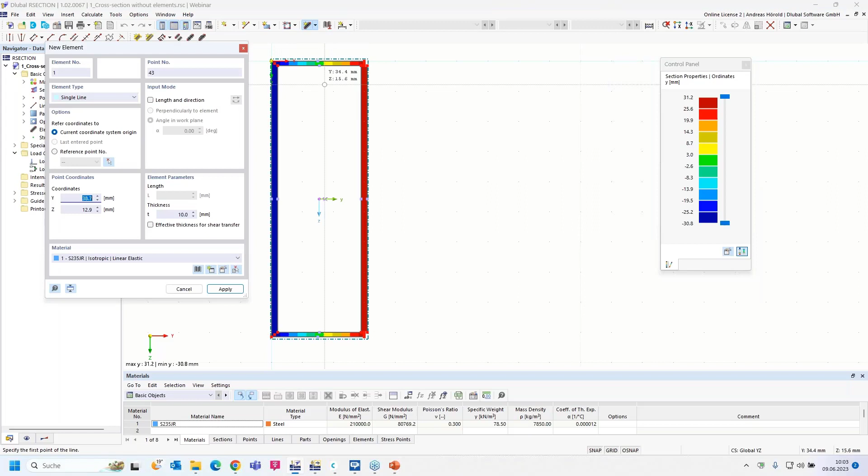How to do that? On the top menu, you can see 'new element'. I use a single element and define the first element here with a thickness of 3 millimeters. Then the next one, that's the web, and that's 4 millimeters thick. Then 3 millimeters.

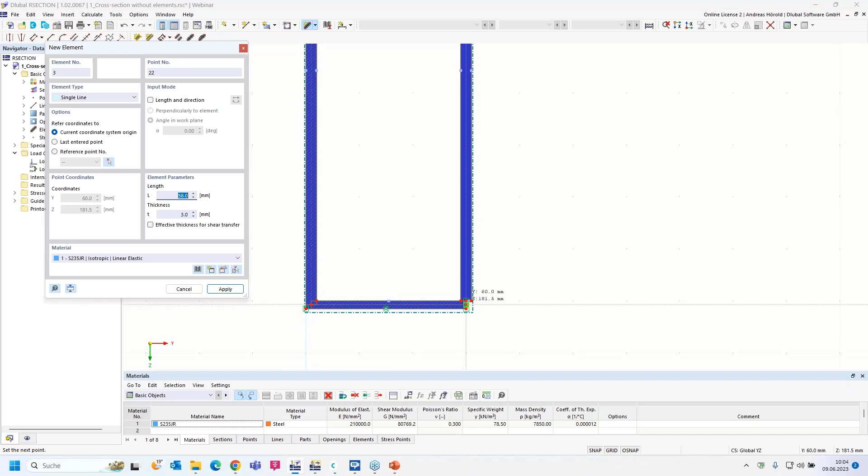And the last one, 3 millimeters. No, that was wrong, that is 4 millimeters. We can delete it, that's no problem. Again, the element, 4 millimeters.

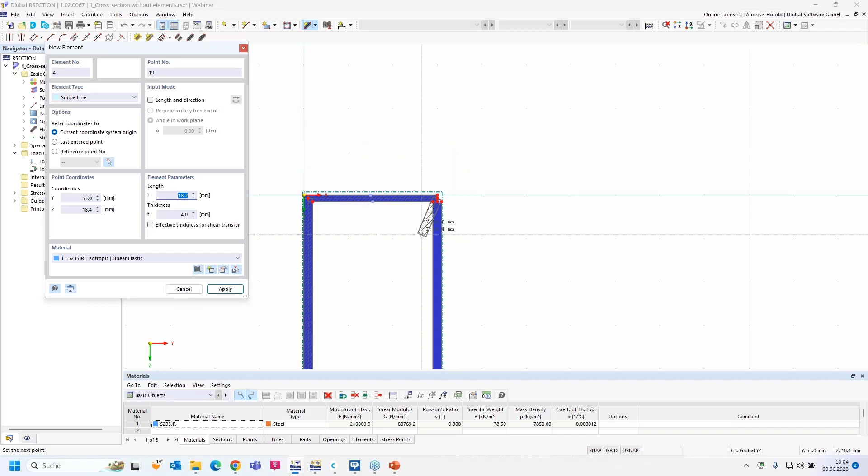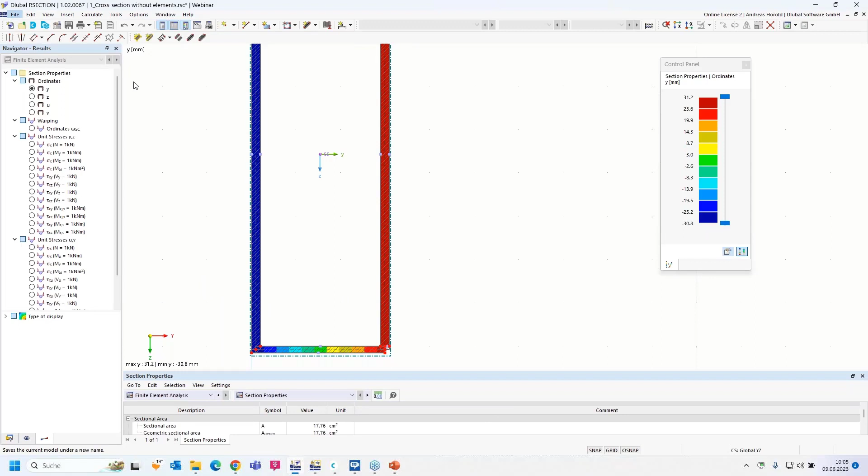That's all. Then I can calculate the cross section again to see all is fine. All is fine. I say File, Save As, 'Cross section with elements' this time, and I overwrite the old one.

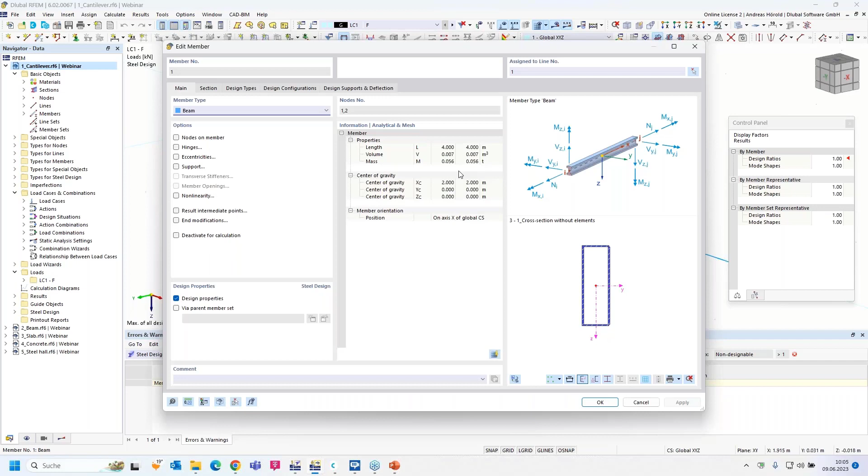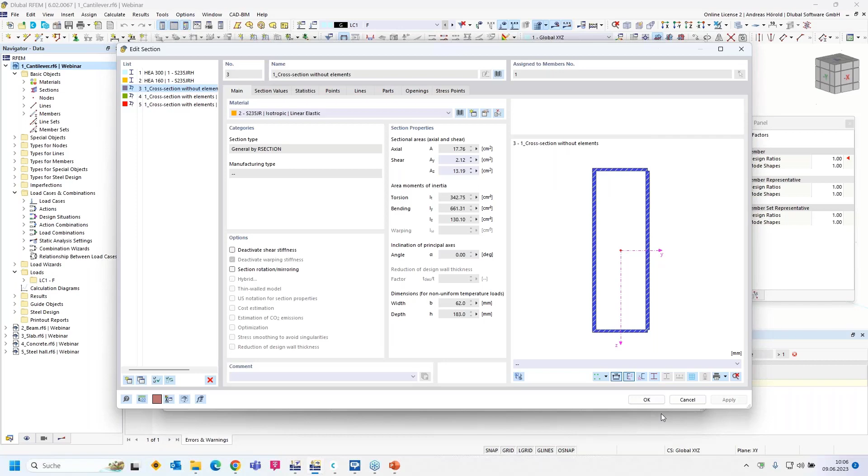Then I go to RFEM 6, double click on the beam, go to section, and edit the section. I go to the library at the top and select from Cross Section Software, choosing the cross section with elements this time. Now the design should be possible.

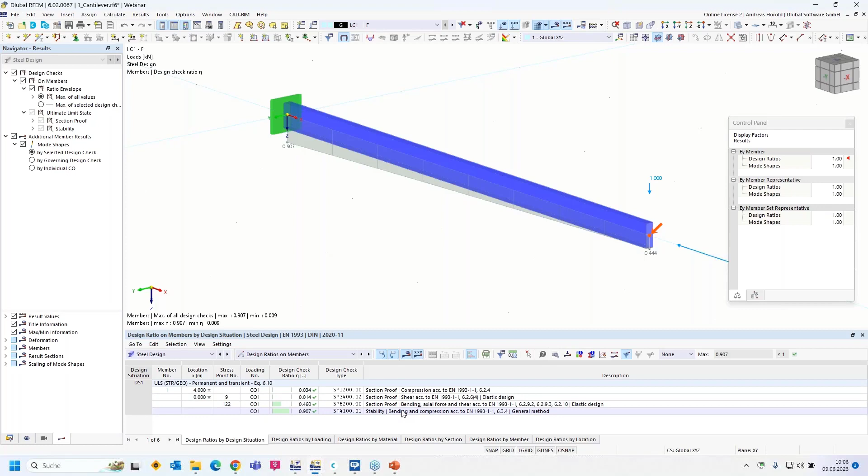Those elements are necessary for the classification of the cross sections. You can see, for example, when you go to the section proof, the section classification here, with all the formulas from the standard and so on.

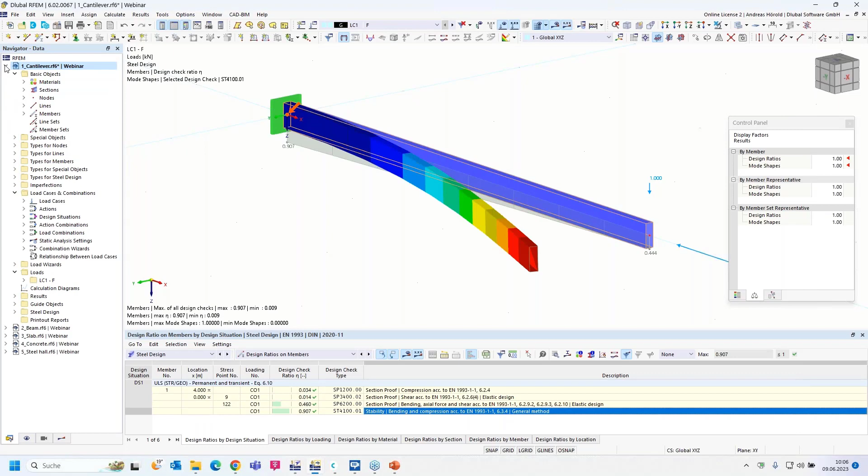Now we turn to the next question: why is my cross section non-designable? You can see the error message from the steel design add-on: maximum allowable thickness of material exceeded.

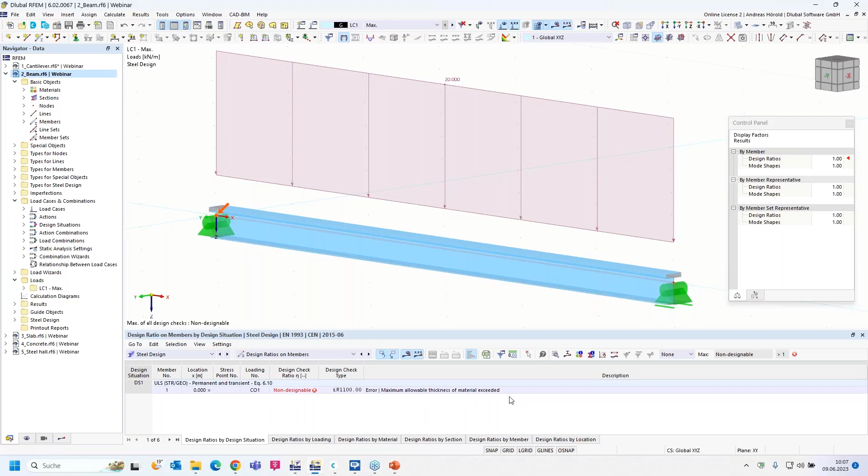We can double click on the member and go to the section. Let me show the cross section - it's a fictive cross section with a very thick upper flange, 45 millimeters thick. When I go to the material, you can see there are only values available up to a thickness of 40 millimeters.

How can you correct that? There are two possibilities. The first is to go to the main tab and check 'user-defined material', then you can enter the values for the maximum thickness and the yield strength.

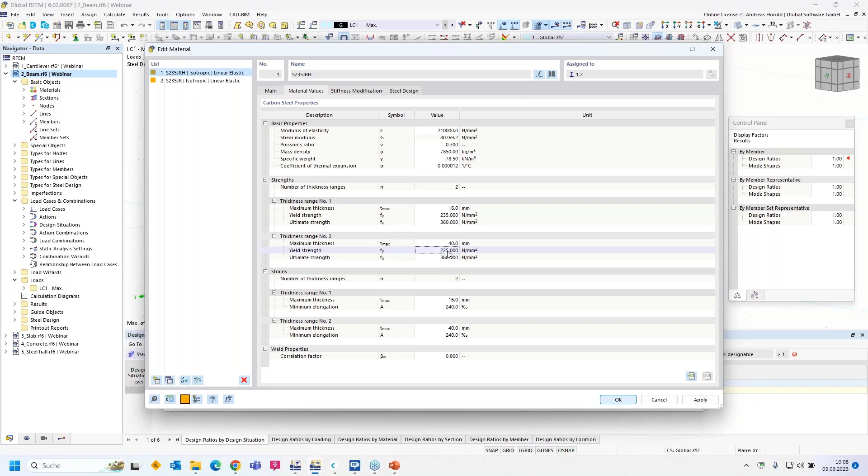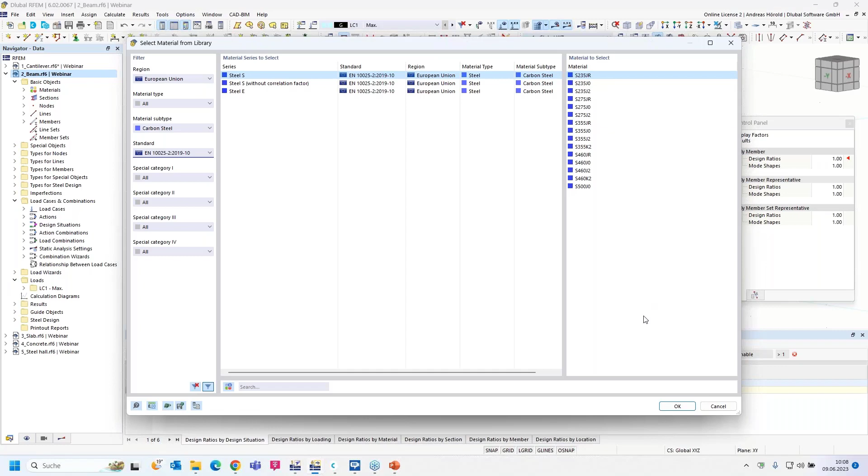But the better option is to modify the material or create a new one - European Union, carbon steel - since I know this code has more values. Now you can see the different thicknesses, 40 millimeters, then 100 as maximum thickness, with the decreased yield strength shown. Okay, I select this material.

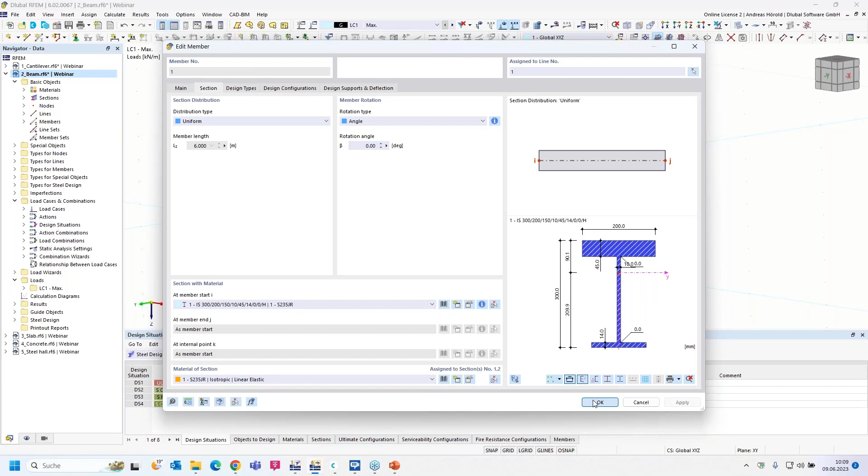Okay, and then the calculation or the design should be run. Okay, now it's okay, we corrected this. Yeah, it happens often that users choose not a wrong material, but a material that's not valid for thicker flanges or thicker members or parts of members.

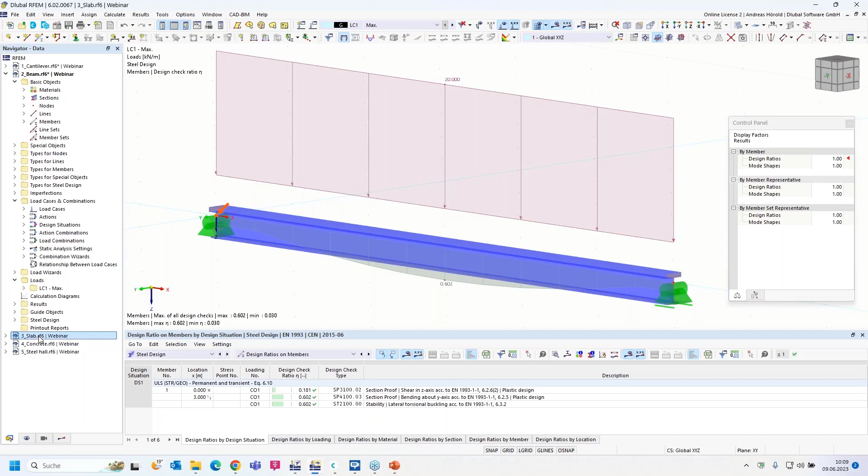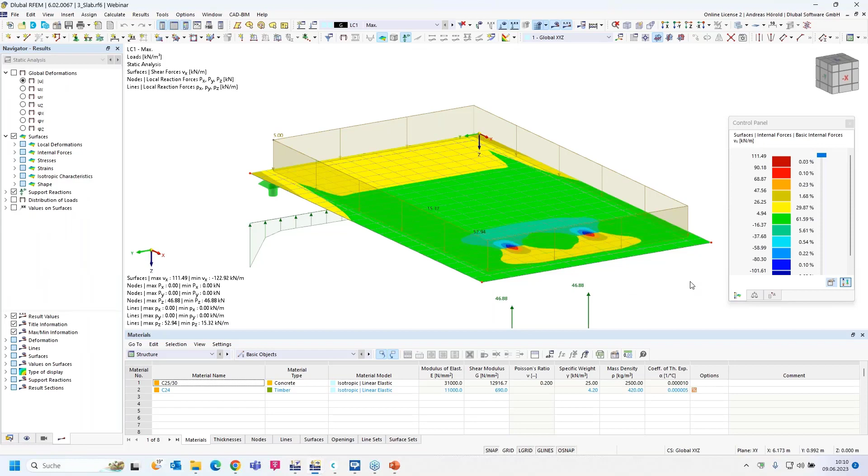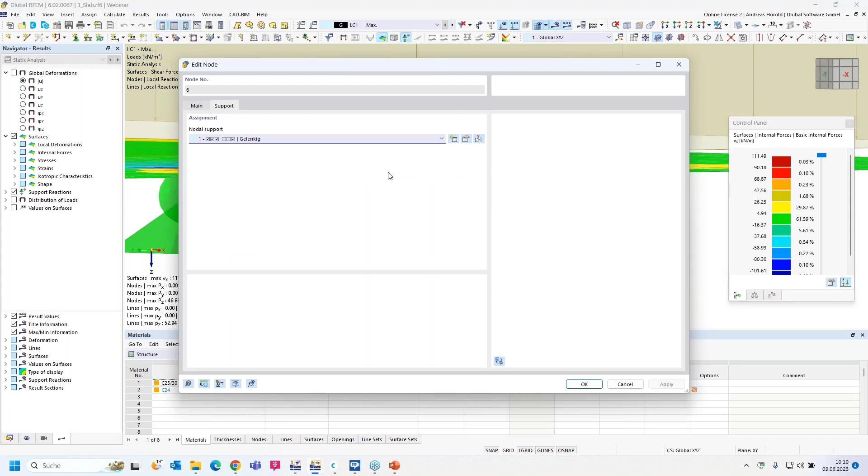Okay, then we turn to the next model and the next question. Yeah, a simple slab. The question is: is it possible to calculate the spring of a column for a nodal support by the program, without modeling the column? Now, if we show the results, you can see through the RFEM calculation there are singularities. We have, for example, columns under the slab, and we defined only a nodal support. So let me double click on the nodal support, on one nodal support, to modify it. I create a new nodal support.

There is this option available, stiffness via fictitious column. And if I go to the table, this fictitious column is recommended for point supports of 2D systems. Here you can determine the support spring constants. You can see them here from the parameters of the column that is not represented. So let me go through the single options.

You have different options for the model support. I'll come back to that later. You can define a rectangular or circular column head, and define the dimensions. I change the dimensions, and when I change the dimension, you can see the changing of the spring constants. Just take a look at them, here. Okay, then, for example, you can enter a different column height.

Then, for example, rigid at the column base, or semi-rigid, or hinged. You can also consider a shear stiffness of the column. Then you can choose a different cross-section of the column if it is different than the column head. Here you have to define the material.

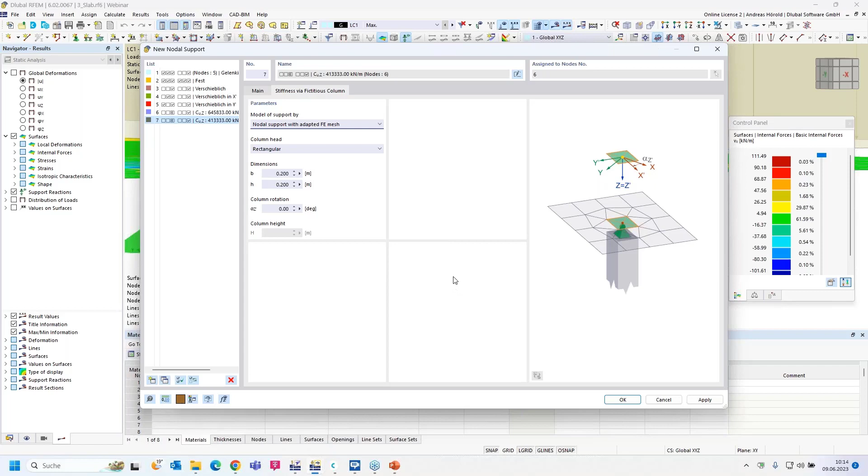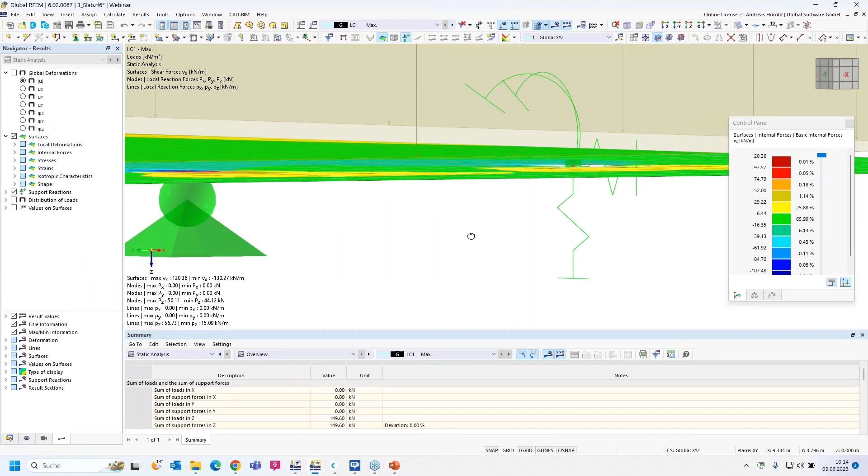Then the last option is the nodal support with adapted mesh, and this model corresponds to the elastic nodal support, the second one, but no springs are applied to the point-like supports. You can see that here, and you can also see that there are no springs. We choose the first option, okay, and we need to calculate it all again. So, and you can see there are no singularities anymore for this nodal support with the fictitious column.

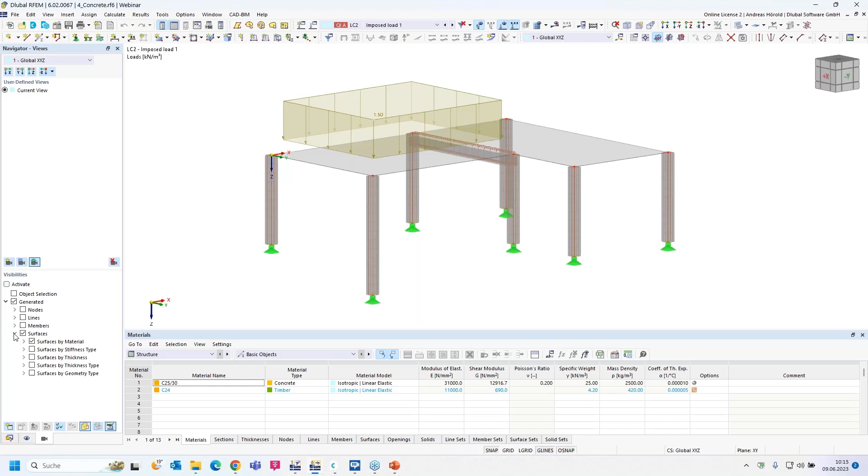Okay, then we turn to the next model and the next question. The next question is: when I select a certain object, why aren't the associated objects shown in the Navigator views? So let's go to the Navigator views here, left at the bottom. You can see the Navigator views. So, and if I activate a view, for example, for the surfaces, there's only one surface, and you can see the surface is displayed and selected, but no lines, no nodes, and so on, no loads and no nodes.

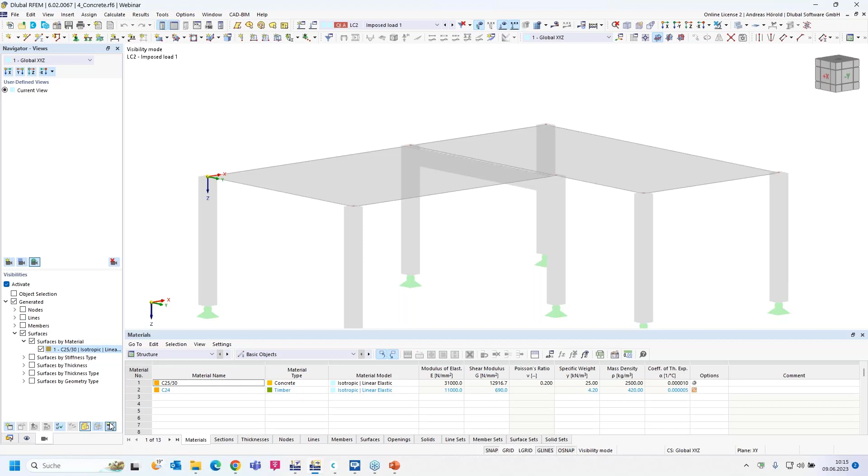Yeah, loads and nodes. And how can you avoid it? Here, left at the bottom, there are nine buttons, and on the right you can activate or deactivate the 'ignore related objects' function. If I deactivate it, then you can also see the lines and nodes and the load that belongs to the surface. And if the function is activated, associated nodes and lines are hidden, as you could see. Okay, those are the different options. Yeah, a quite hidden button. Okay, that should be all for this model and this question.

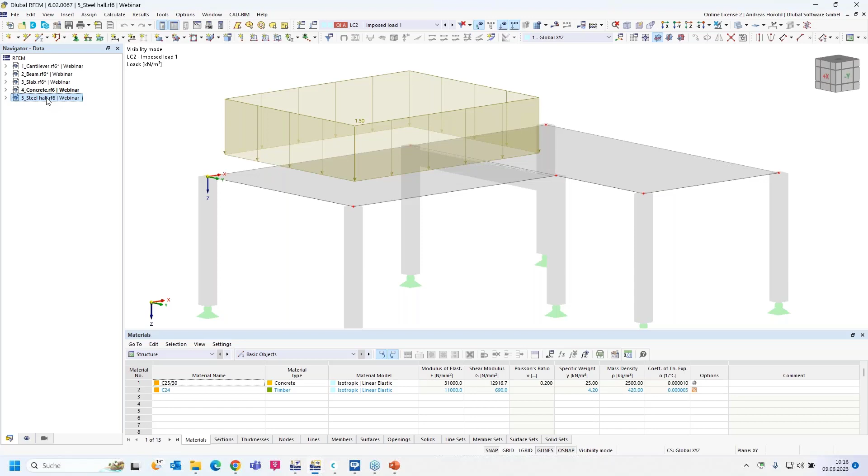Turn to the next question. When designing steel structures, I get a message that bending about the z-axis is not applicable for the general method. What can I do to still perform a stability analysis?

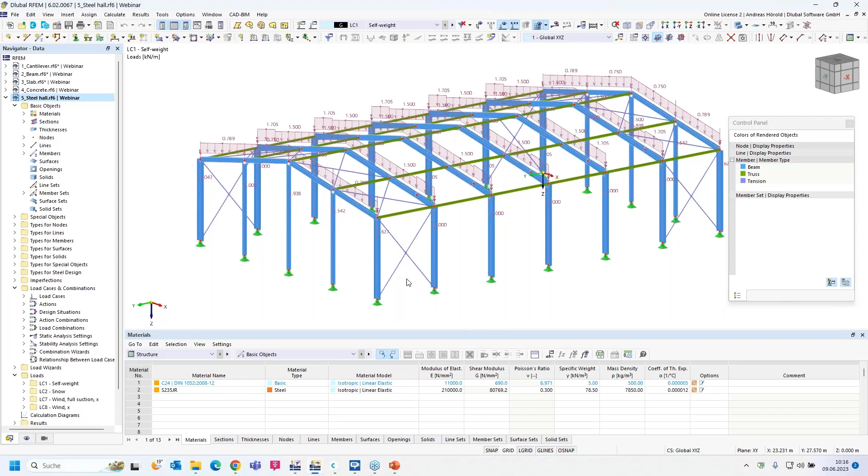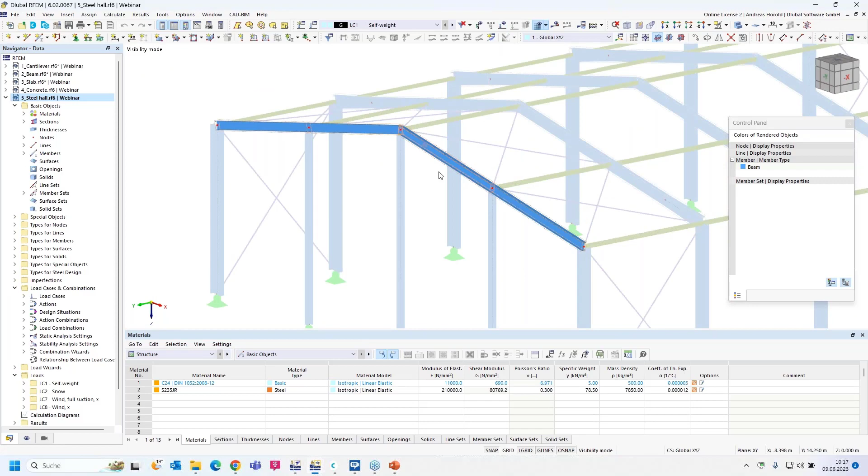Let's do that on an example. I would like to design this member or this set of members. I select only this member and use visibility by selected objects. I double click on the set of members.

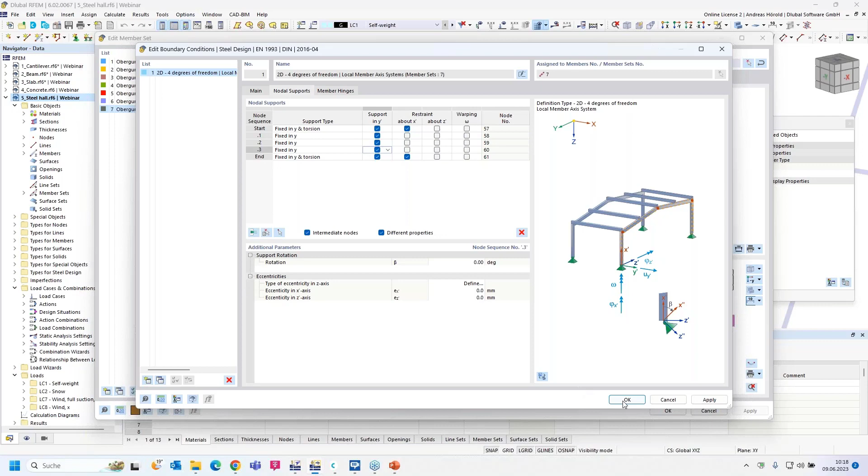For design type, I select this design type. For boundary conditions, I define the nodal supports. I click on the member set, and the program recognizes the intermediate nodes. I would like to also consider a support in the horizontal direction through the coupling members. You can see the supports here, and we can run the steel design to design only this member set.

This is member set 7. Let's run the calculation. Now we will get the mentioned error message.

The message is: general method according to Eurocode 3, 6.3.4, is not applicable for bending about z-axis. The reason for that warning is that the member set is designed according to the general method. However, this method is only allowed for loading applied in the load-bearing plane, that is, without transverse bending moments. That's why the warning appears.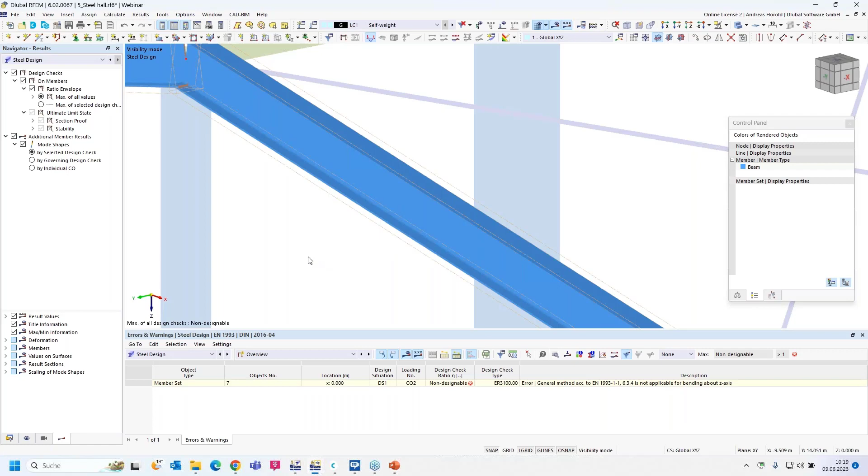There are different possibilities to avoid that. One possibility is to use the torsional warping add-on, which allows you to perform a stability design according to second order analysis as a cross-section design. But there are also possibilities to avoid using the torsional warping add-on, using the steel design add-on instead.

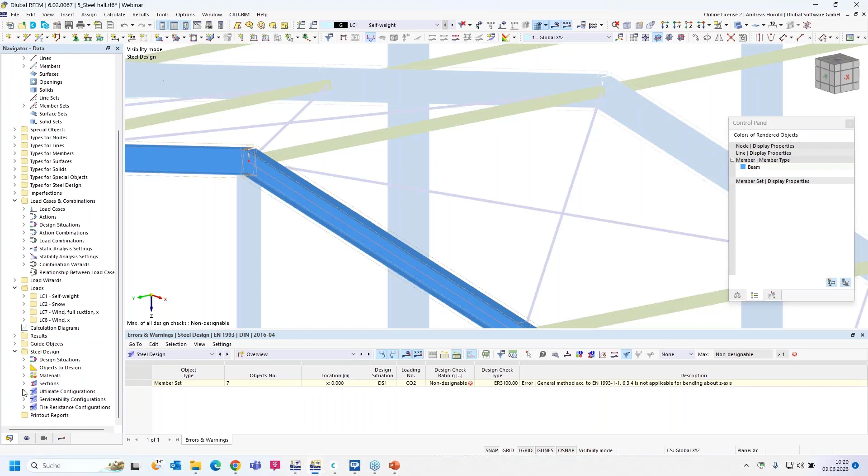As an alternative, you can activate the transverse bending in the ultimate configuration. I open the Navigator data, scroll down, and under steel design you can see the ultimate configuration. I double click on that. If you are sure that you can ignore the Mz, then you can increase that value here. That would be a possibility.

Another possibility is under the stability tab, where you can check the extension methods and then the adapted method. This enables double bending. So those are two possibilities. And another possibility is to...

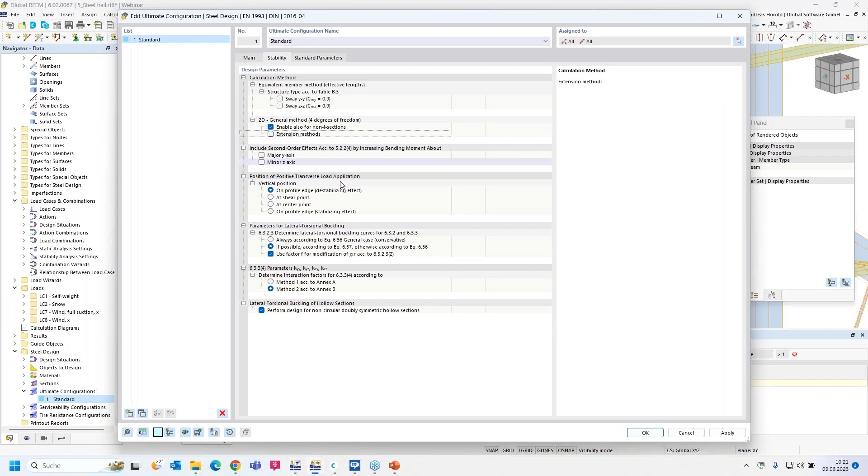I go in the member editor again, and I change the design type from the general method to the equivalent member method. That's why I have to define effective lengths here.

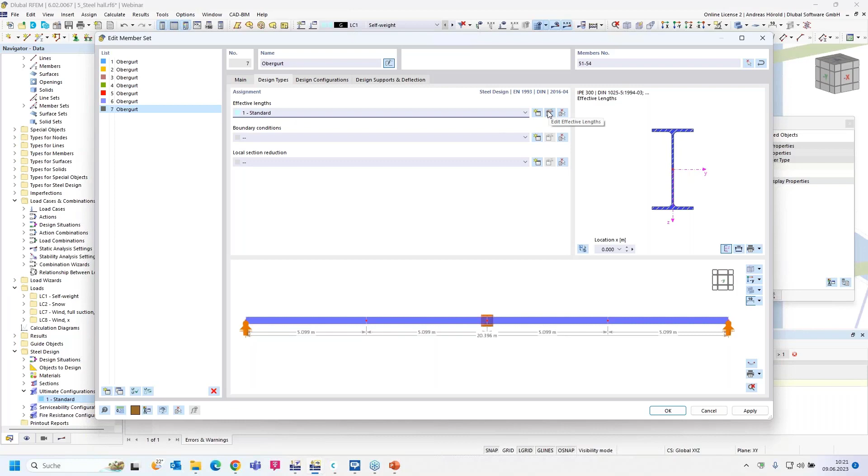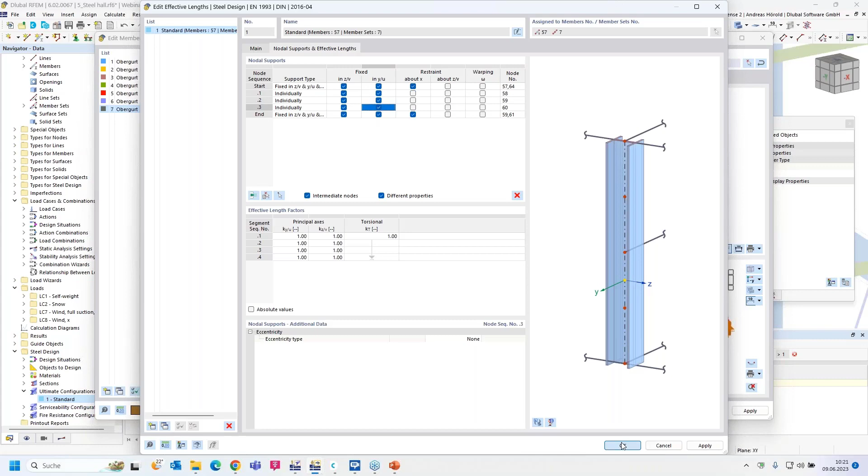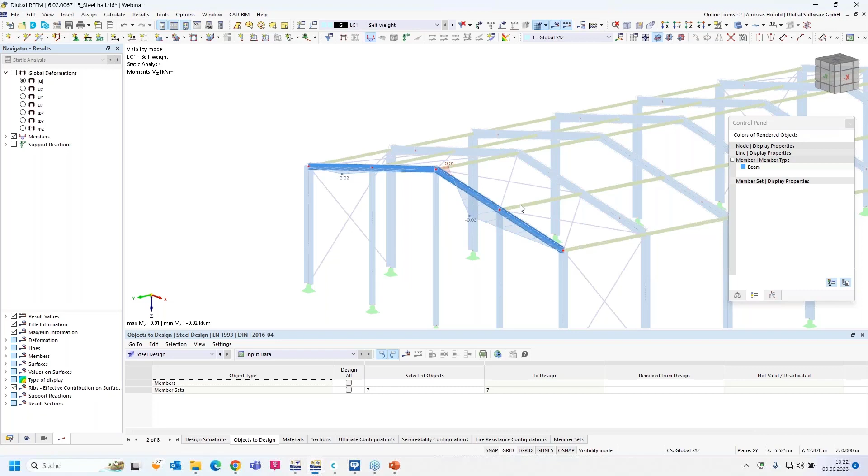For nodal supports, I can read the intermediate nodes again, and then I check the Z direction and U direction as support. You can see the supports here, in that direction as in a global Z direction through the columns, and in horizontal direction through the coupling members. I run the steel design again, and now you can see all is fine.

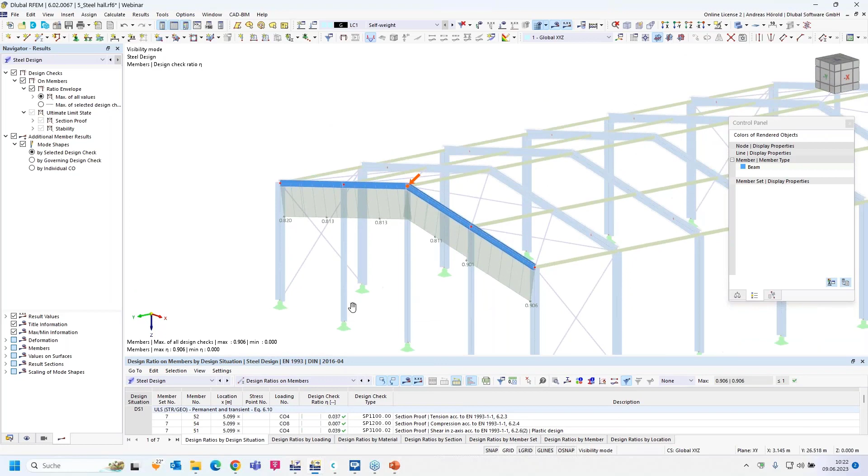We stay in the same model, but turn to the last question for today: how can I create as quickly as possible a rigid connection for a ridge with an end plate using the steel joints add-on?

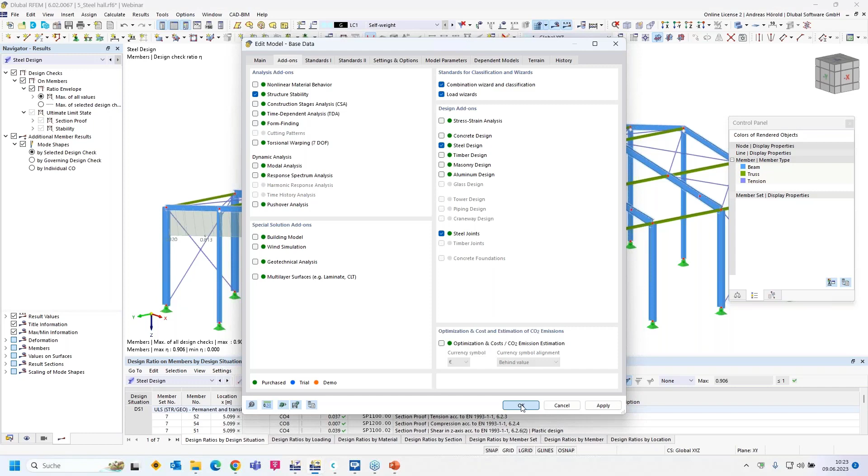First, you have to activate the steel joints add-on here, left at the top. Under add-ons, you check the steel joints add-on. Then we go to the design situations, where the steel joints add-on is automatically checked on for the design.

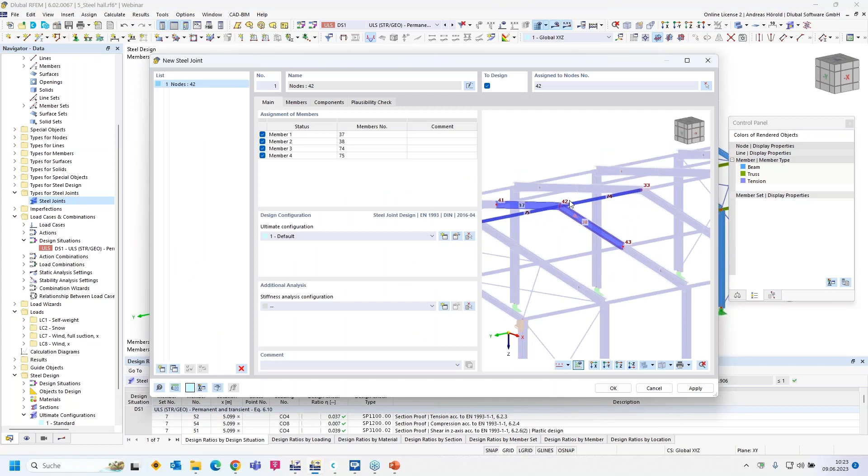Under types for steel joints, you can double click here, for example, and then assign a node. You can also check on or select more nodes. In our case, the coupling members are not of interest, so we deactivate them. I go into the members - at least one member end must be supported. Material and section, we don't change.

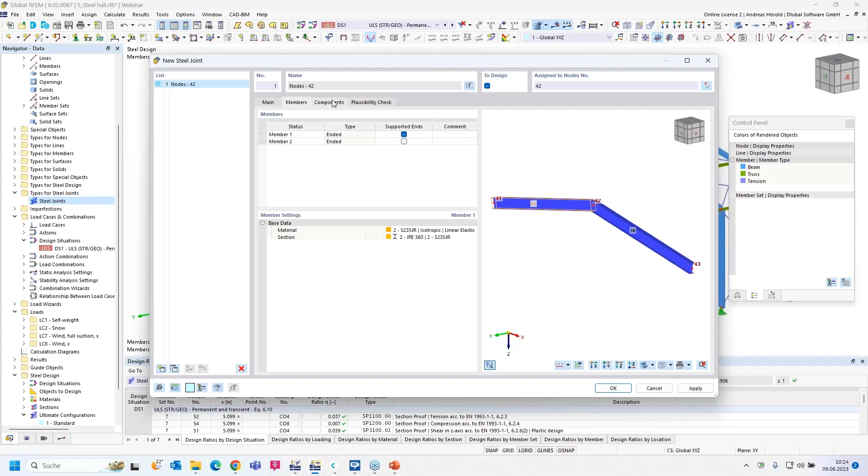Under components, we would like to create two end plates here. You can do that with the components. There are different components, and you can see the plate-to-plate component here. We have to do some modifications, but I'll delete that.

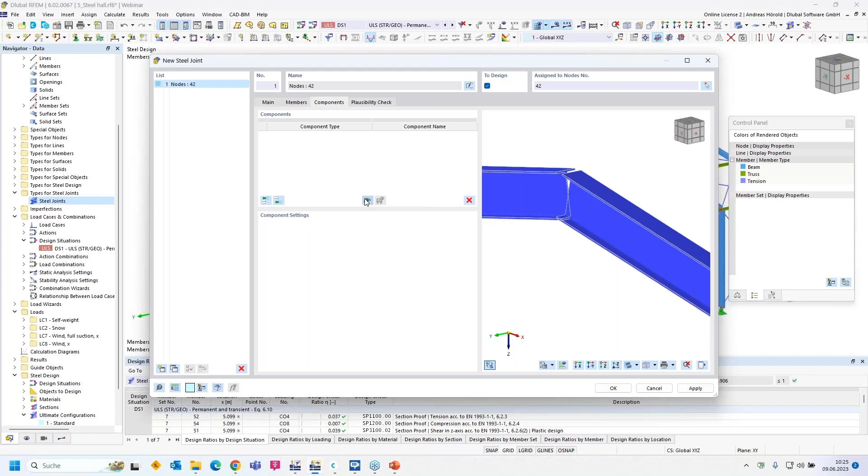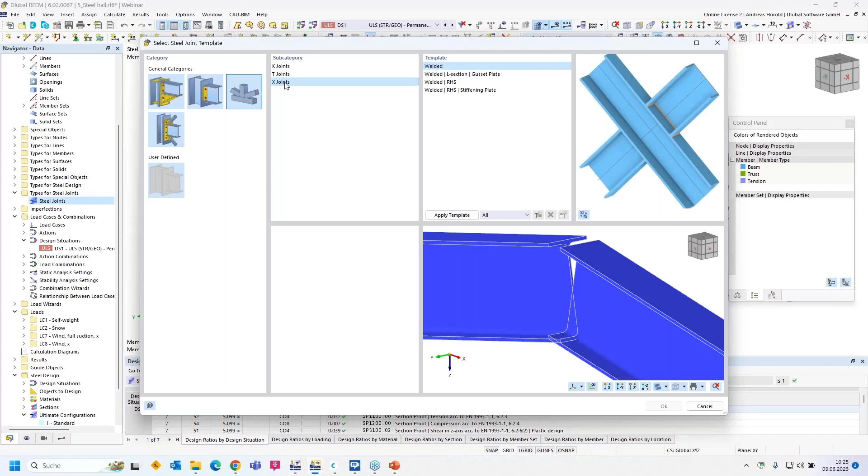I would like to show you also the other possibility with the component library. There are many more connections, also for rigid. On the left side, you can see the rigid components with haunches and so on, for beam to continuous column and so on. Then the pinned connections, beam to beam, such components. Then the trusses - K joints, T joints, X joints, and so on - and the bracings. Already a lot of components, and of course we extend that library continuously.

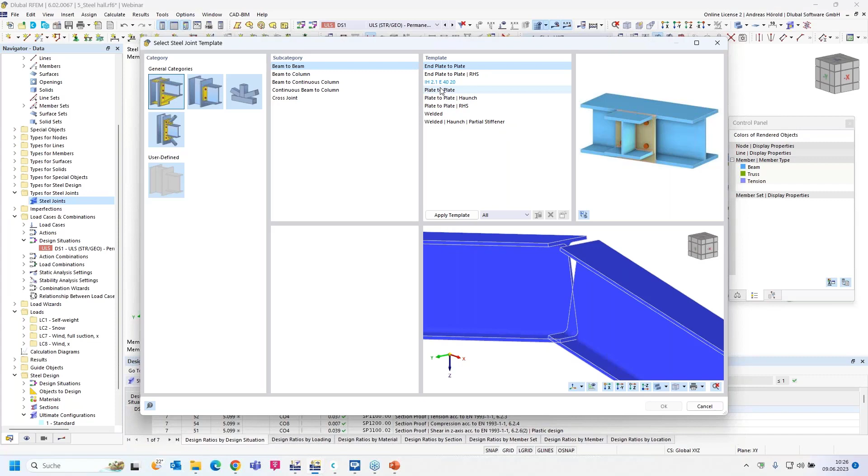So we have the category rigid and beam to beam, and we select plate to plate here. If I apply the template, you can see the preview here, and we press OK, and it takes that over. Half angle is already OK. You can also select perpendicular, but we use half.

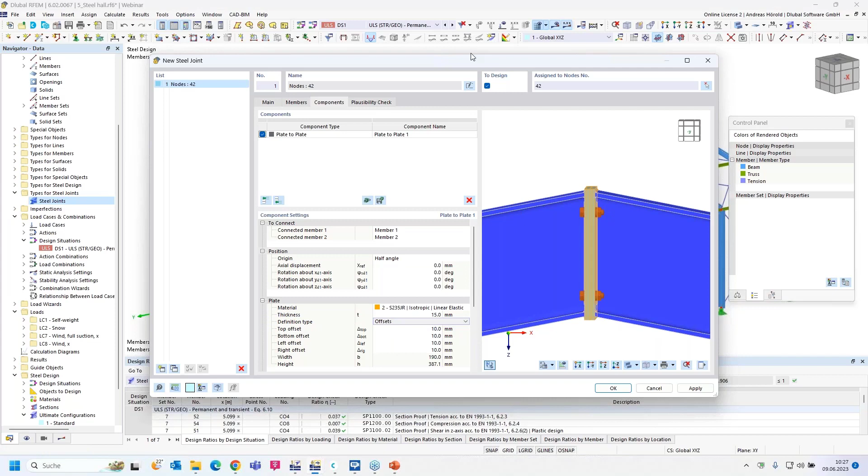So the material should be the same as for the members, S235. And as thickness, we use 15 millimeters. I increase the window a little bit, okay, also in that direction.

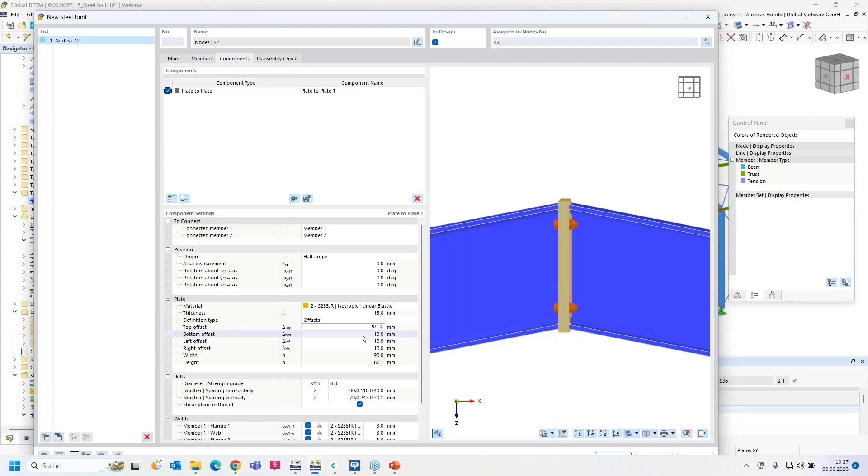So then for entering the plate parameters, you can use the offset or the dimensions and position, as you like. Now I enter my values here, 20 millimeters for the top offset. You can see all changes directly in the preview. You can also define a minus offset, for example, if you have trapezoidal sheets at the top of the flanges, then such a connection or offset would be better. We don't have that in our example.

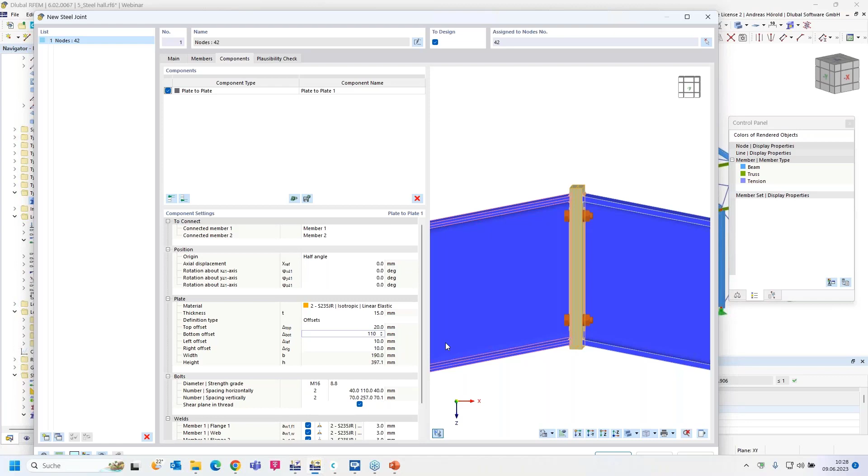So 110, 10, 10, 190, yeah, all the parameters are quite okay. Then we turn to the bolts.

We have to select the diameter, from M12 to M36 are available. I select M16 and I select the strength grade 10.9. The spacing horizontally is already okay, but we want to have 6 bolts in the sum.

And I have to enter the spacings, at least the first 3 parameters: 169, 180, and the third parameter is calculated automatically. You can select the shear plane in thread or consider the shear plane in thread or in the shaft if you want.

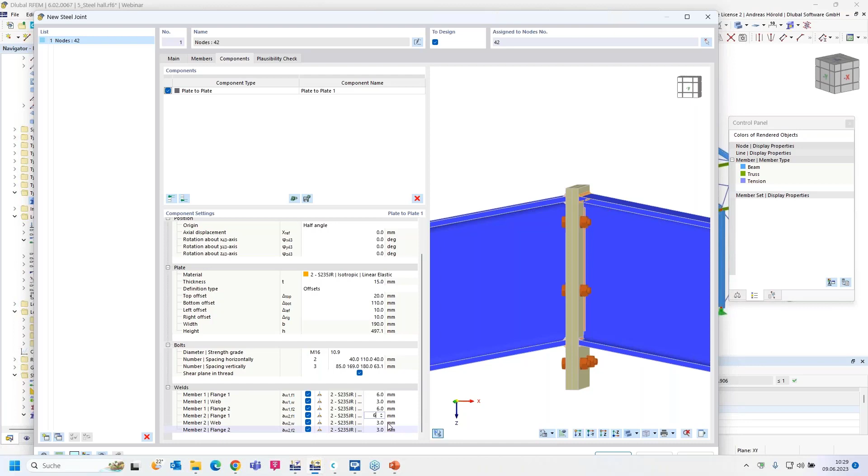So then we have to define the welds for the flange, 6 millimeters, web 3 millimeters, flange 6. And on the right side you can see which value you define. So now the lower flange, the weld of the lower flange. Okay, that's fine.

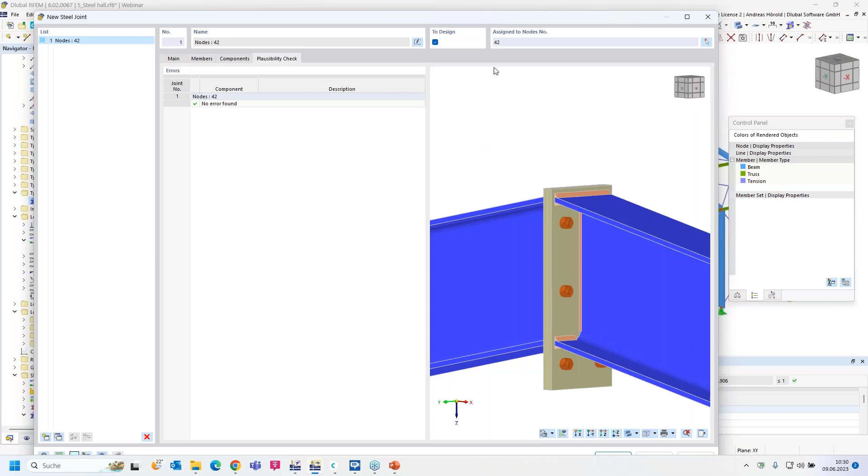We turn to the plausibility check. No errors found. So I can leave the dialog and we can run the steel joints calculation.

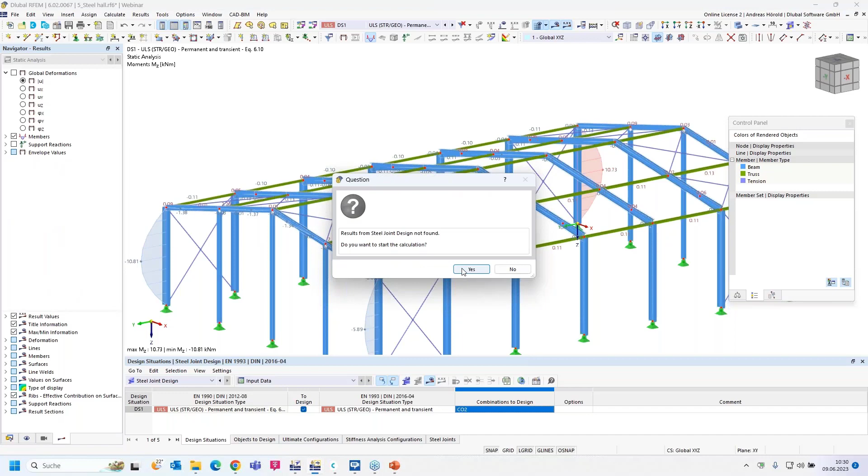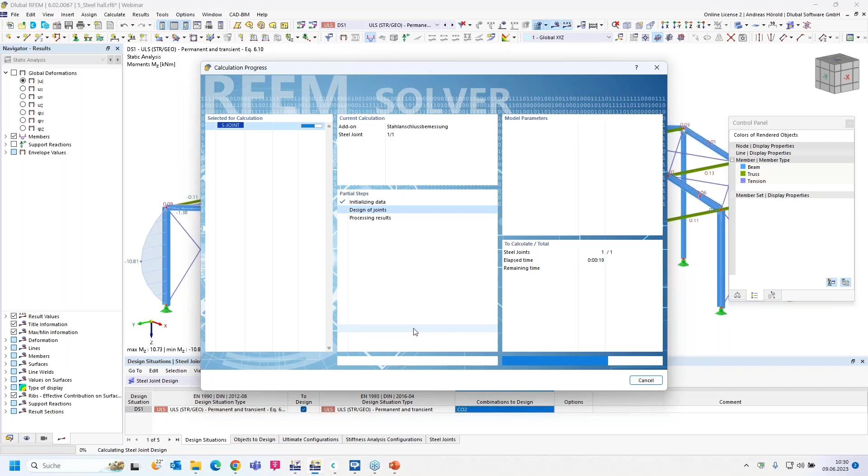To not have to wait too long, I select only the maximum combination, number 2. So I can run the calculation. With the calculation, there will be created a submodel with surfaces and so on, and that's quite complicated. That's the reason why it takes a short time.

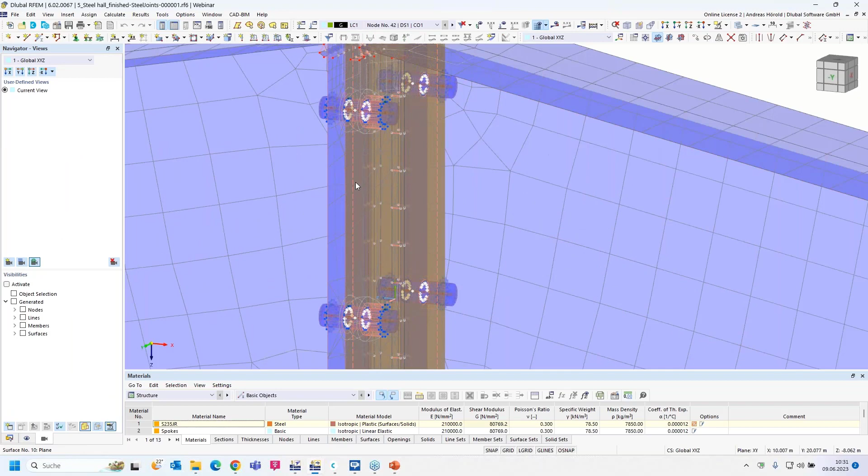While the calculation runs, I can also already switch to the submodel. I saved that previously, that's the submodel. Now you can see where I don't display the results. You can see the plate here, then the bolts, with such spokes that are help members. Then here you can see the weld, the surface of the weld, and then there are such rigid links.

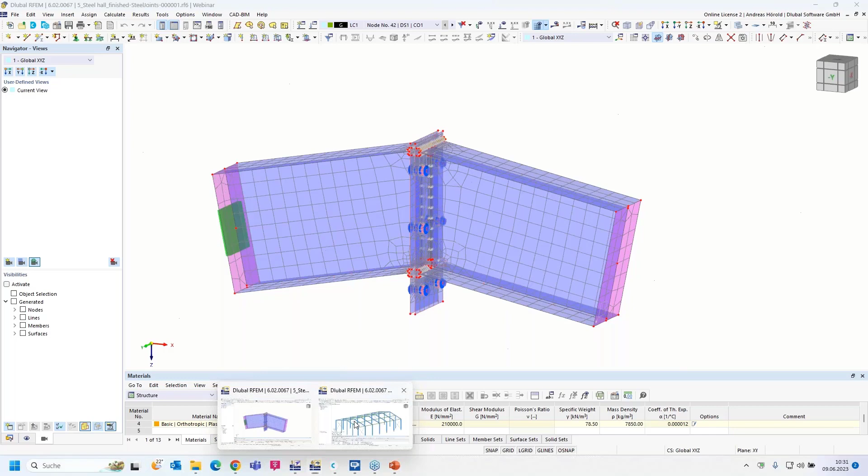And that's the submodel that is calculated in the background. Usually you only see the results here. The calculation is finished.

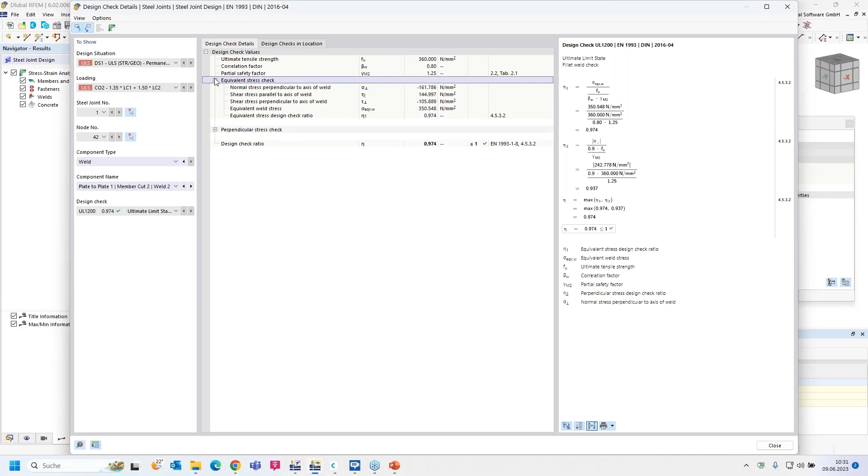I can double click, for example, on that line here. You can see all the formulas, in that case for the weld. And you can see also where are the formulas in the code.

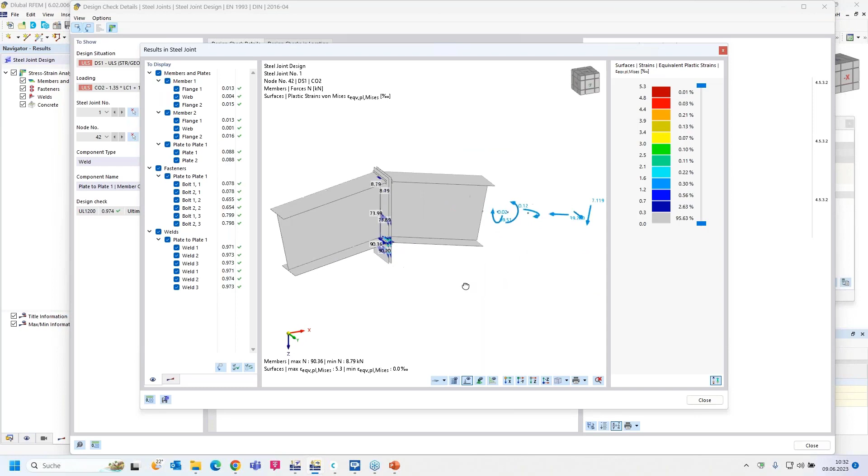So if you click on the left side here, above on the left side, results in steel joint, you can see the surface model with the results. You can deselect, for example, some parts of the results to show only the welds and the fasteners, or only the welds.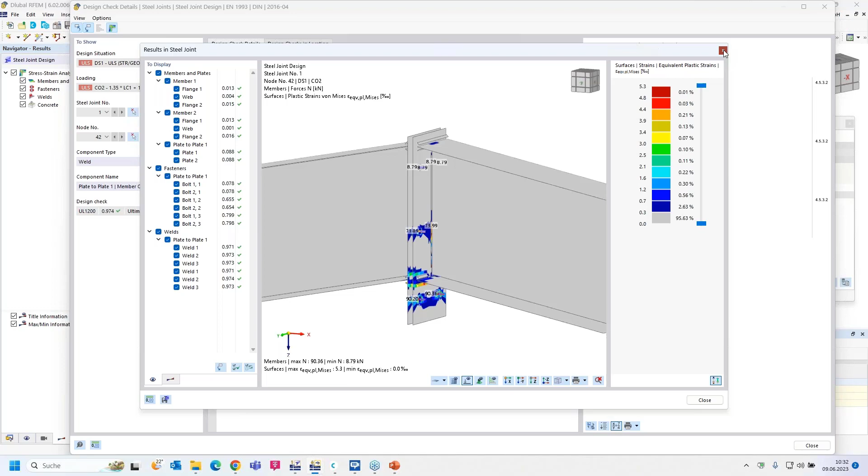By pressing that button, the submodel, the steel joints model, will be saved. And that's the model what I showed you during the calculation. Yeah, that was all for the presentation.

Before I would like to show you where you can find the recording and the models, I go back in the PowerPoint.